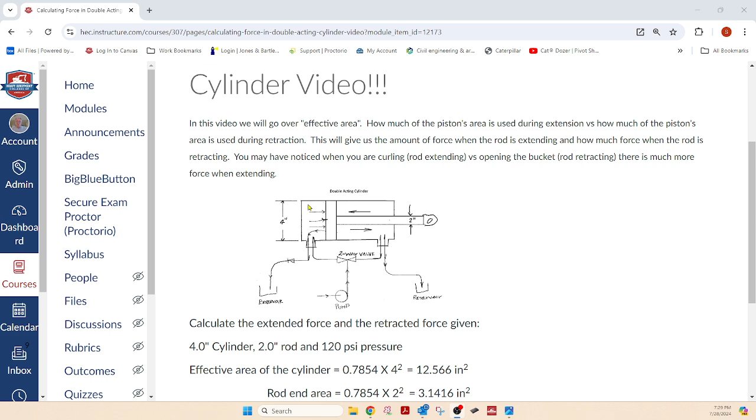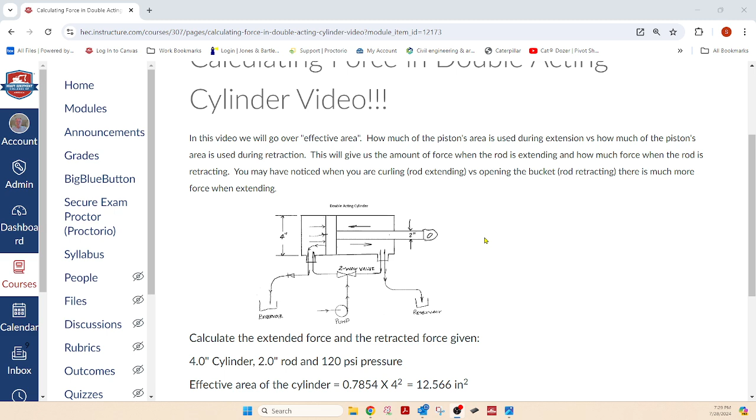So we want to calculate the extended force. In other words, how much output are we going to have with this 4-inch diameter piston and 120 psi pressure. So first of all, do you recall what force is equal to? Force is pressure times area.

I wish I'd have put that up here, but I didn't. So make a note of that. You'll need to know that force equals pressure times area. And that's what I've asked you to calculate, for goodness sakes. So force equals pressure times area. How much pressure is on this area.

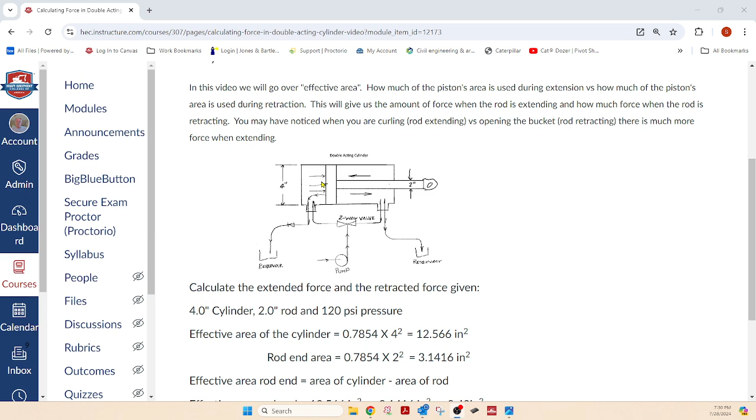So in the effective area of the cylinder, and remember I'm changing to this formula to save time, to get the area, you want to take 0.7854 times the diameter squared, which is 16. And for the effective area, which is this side, the side he gets to use, we get the whole cylinder, it's 12.566 square inches on this side.

Now, on the rod end, the rod is 2 inches. So to find the area there is 0.7854 times 2 squared, which is 4, gives us 3.1416 square inches. So you see there's a lot more area here, over twice as much than there is here. So let's look at effective rod end area. Now that's this end and this piston. We have what's called annular area. We have to subtract the area that the rod's taken up.

So to find the rod end area right here, you take the area of the cylinder over here, which is 12.566, and you subtract the area of the rod, which is 3.1416. So you take 12.566 square inches minus 3.1416 square inches, and that gives you a rod end area. That's the area that's exposed to fluid, the area minus the area of the rod. That is 9.42 square inches.

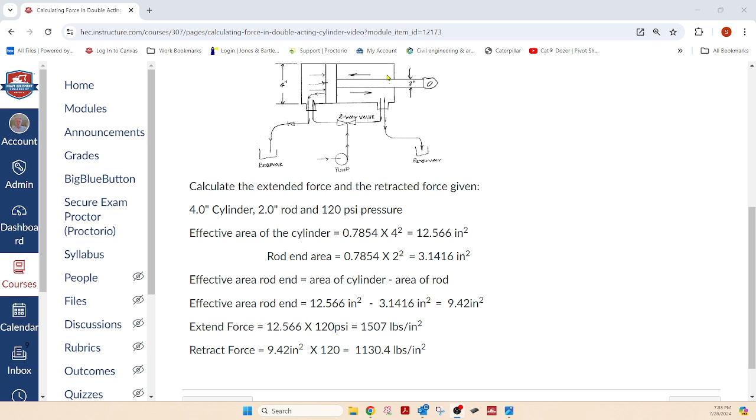So see, on the rod end, you're going to lose a little force because you're going to have a little less area. And folks, that's all there is to it. This is the very beginning. We will need all this preceding our calculations for actuator speed, and way at the end of the module, if we have time, we'll get into horsepower, which is interesting. So anyway, that's all for right now. Not going to go any further.